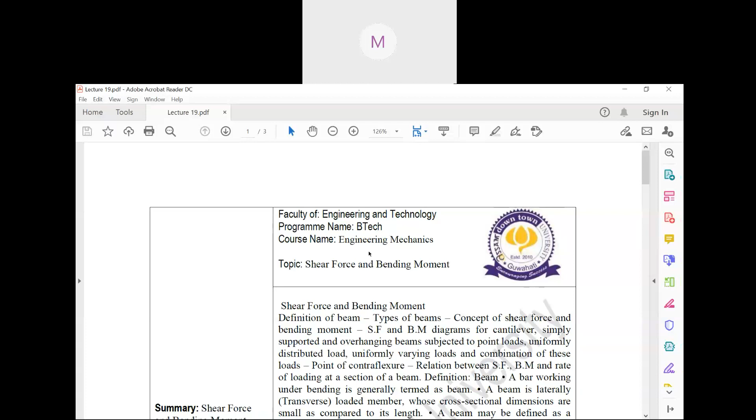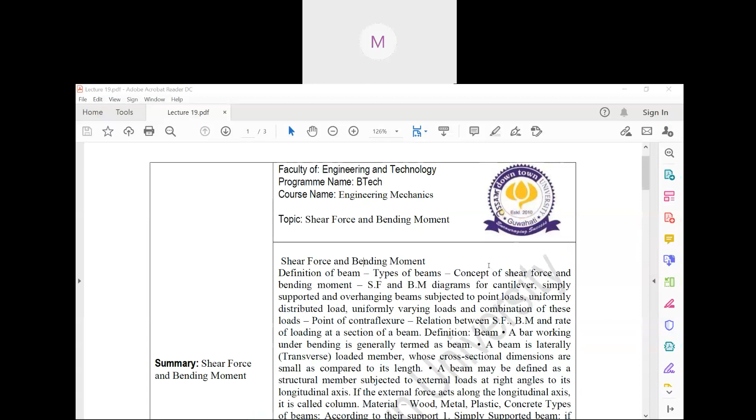So yesterday I gave you a brief introduction about beams, right? Are you clear about beams? What is a beam and everything? So today we'll discuss those things only, but in a more elaborate manner. So basically, what is a beam? Yesterday I discussed that a beam is a laterally loaded member whose cross-sectional dimensions are very small compared to its length.

Now, a beam in a structure may be defined as a member that is subjected to certain external loads, which means it is under the influence of certain external loads. Now there are different types of loads. These loads may be dead load, live load, self weight, whatever it may be. Okay.

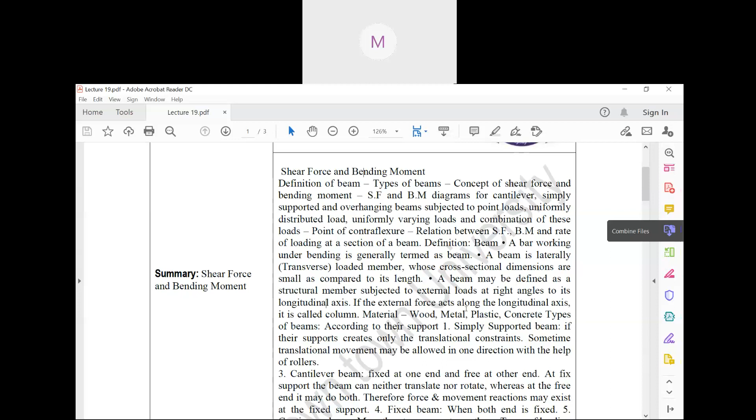So now in a beam, the load acts only in what? Perpendicular to the beam. Okay, that means what? Suppose this is a beam. The load will, in most cases, be perpendicular. Okay, so now according to the support, there are different types of beams. First of all,

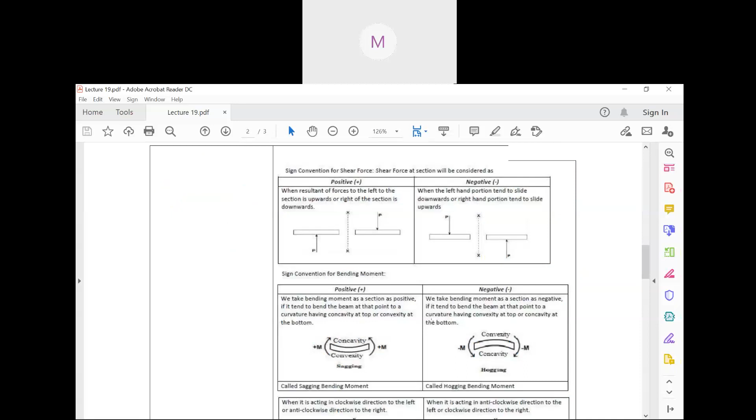number one is simply supported beam. In a simply supported beam, the beam creates only translational constraints and translational movement is allowed in one direction with the help of rollers. Suppose we draw a simply supported beam in this manner. In this simply supported beam, these two are the supports. And the load is placed like this. So the beam is simply supported here. Just remember that.

Now, number two is cantilever beam. In a cantilever beam, the beam will look somewhat like this. One end, as per definition, is fixed, and the other end has a load. This kind of beam is called a cantilever beam. One end is fixed; the fixed end is denoted in this manner. So this is the fixed end and this is the free end. So this is known as a cantilever beam.

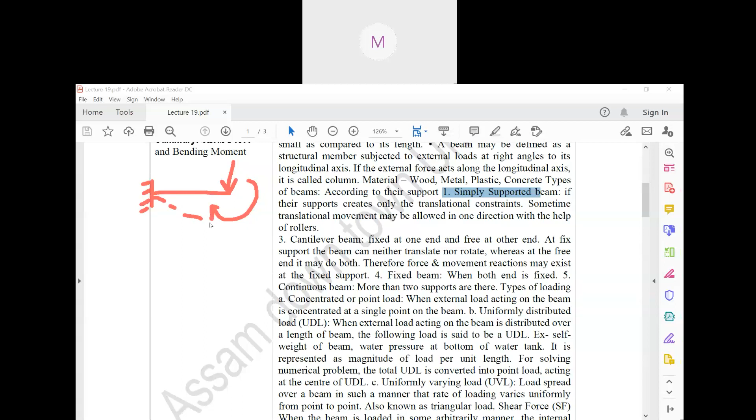Suppose this is the cantilever beam. Now you are given certain loads. If you are given certain loads, there may be rotation, or it will come like this. So this is translation movement and this is rotation movement. So at the free end it can do both. Therefore the reactions of this force will exist in this part. This is the basic fundamental thing of a cantilever.

Now a fixed beam is just like this. It is fixed at both ends, so the fixed ends are denoted in this manner. Okay, so this is a fixed beam. That means it is fixed at both the ends. Okay, got it? These beams are fixed at both ends, so this is known as a fixed beam.

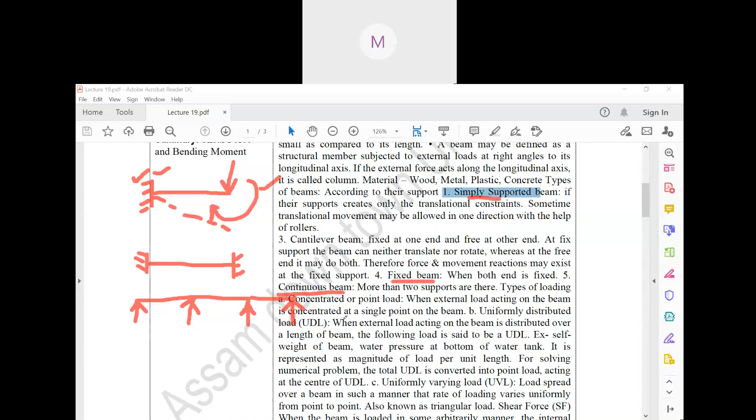Now after that, it is continuous beam. In a continuous beam, the beam is supported by... here is one support, here is another support. If it has two supports, then it is simply supported. Now if it has more than two, like it is continuous, suppose another support is here, then it is known as a continuous beam. Okay, it should be clear to all of you. I'm showing you certain examples now.

I guess it should be clear for all of you now. Yes, sir. Wait, let me show you certain examples; it will be more clear for all of you.

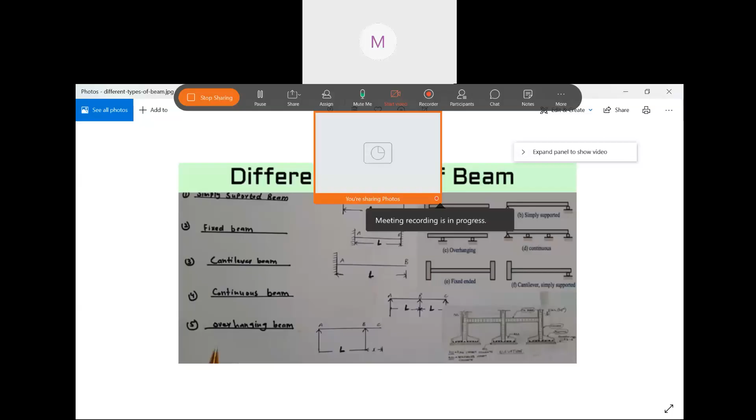Can you see the screen? Can you see the screen, students? No, sir. Okay, give me a minute. Now is it visible? Is it visible now? Yes, sir. So look, these are the different types of beam, sir. Yeah.

So number one is what? Simply supported. So in simply supported, if you see the supports like this, A and B, so it is simply supported. The distance between the two supports is what? L. Got it? So in figures, you can see it in this manner. Okay. Now after that, it is what?

Fixed beam. Look, I draw it like that. Fixed beam like this. Now this is point A, the first one, and second one is point B. And the distance between them is L. So that means the distance between the two fixed ends is L. Now this is the example of fixed ended beam.

After that you come to cantilever. Remember this thing. In cantilever, one end is fixed, and the other end is free. Okay, so this is cantilever. Now in continuous beams, what happens? The beam is continuous. Look, here is another support here. So these are the three supports: A, B, and C. So if there are three supports, then this is known as a continuous beam.

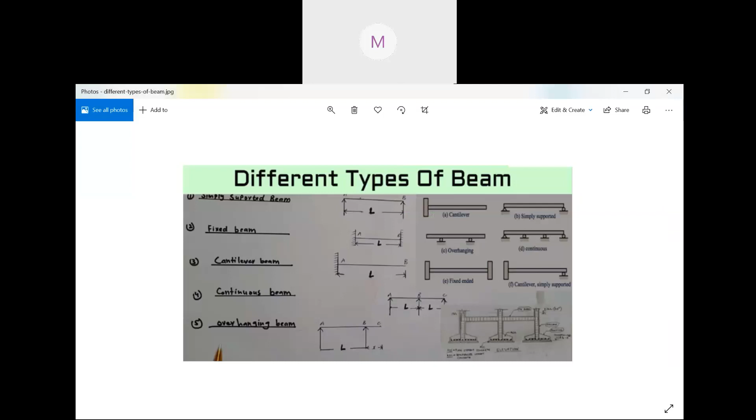So now after that, we'll go to the types of loads. So you got to know what are the different types of beams. Now there are basically three types of loads. So number one is concentrated loads. What is actually a concentrated load?

So in concentrated load, what happens? It is a point load or concentrated load. So what is actually a point load?

Sharing a slide, sir? No, sir, we can't see anything. No, I'm not sharing anything. Wait, I'll share it. Just a minute. Try to understand. Then only I can tell you.

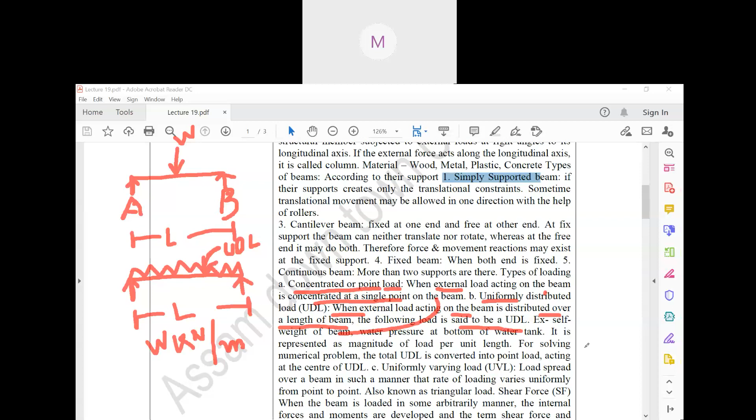That means what? When the external load acting on the beam is distributed over a length of beam, the following load is said to be what? UDL. Now look, what is an example of UDL? Suppose there is a water tank above a beam. So the load that is acting, it is uniformly acting on the beam, right? So that is known as uniformly distributed load. Okay. So the load of UDL is acting per meter length. Okay. So now I'll show you certain pictures, then you will understand it more clearly.

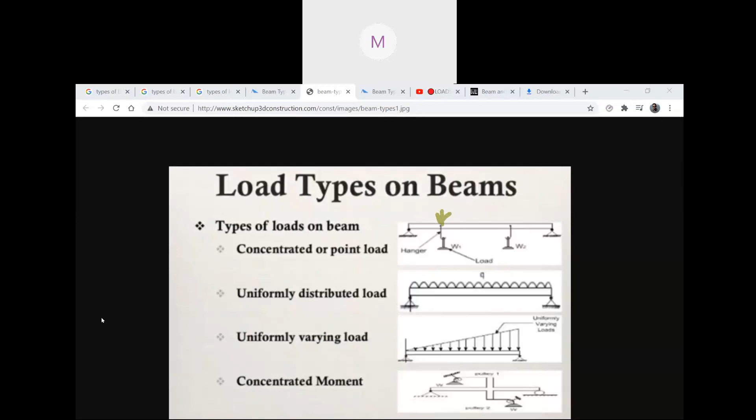Now if you can see, can you see this one? Can you see it? Okay, so if you can see here, what are the different types of loads? Look, here there is one concentrated or point load. So that means what? This is shown in a different member, but it can be acting in this member. Okay, so these are concentrated or point loads. Now uniformly distributed load. Just now I showed you this is uniformly distributed load. Now uniformly varying load means what? It is varying. Okay. So this one leave it for now. We will discuss it later.

So this is uniformly varying load means what? Look, this load here, a load of W is acting per meter. That means what? This is uniformly distributed load. Now, if it is acting per meter, then if we measure, suppose this is L meter. So if we measure the whole distance, W into L, then we will get what? In the form of a point load, right? It is acting whole, now per meter.

Suppose this is 5 kilonewton per meter, and the distance L is equal to 4 meter. Now, in order to convert this thing into a point load, we can just multiply it with the distance, then we will get the point load. Okay, so this is how it is being done. It'll be clear for you once we do the numericals. Okay.

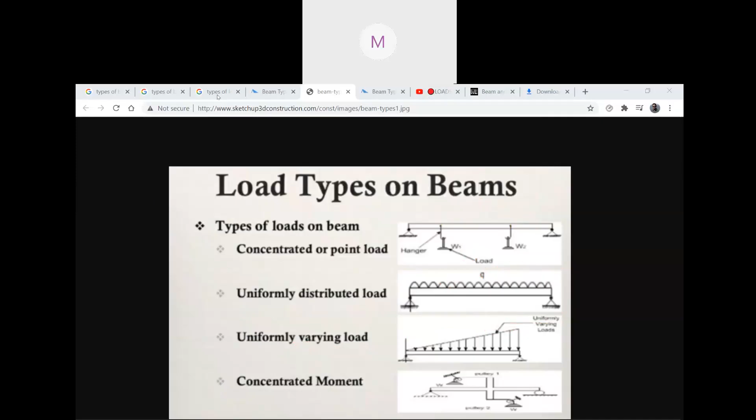Now another important thing that I want to tell you is regarding this one. What are actually the different types of supports? So if you can see the slide here, look, these two are the different types of supports in a simply supported beam. Okay, this should be clear to you actually. This is a hinge support. We'll discuss these things maybe next semester in structural analysis, in a more elaborate manner. So as of now, you just remember it.

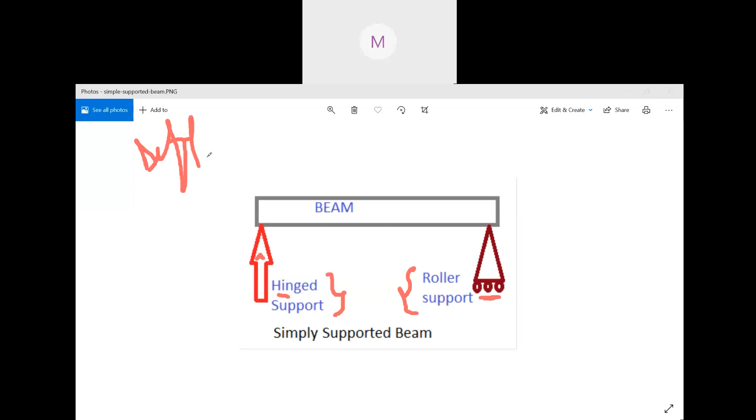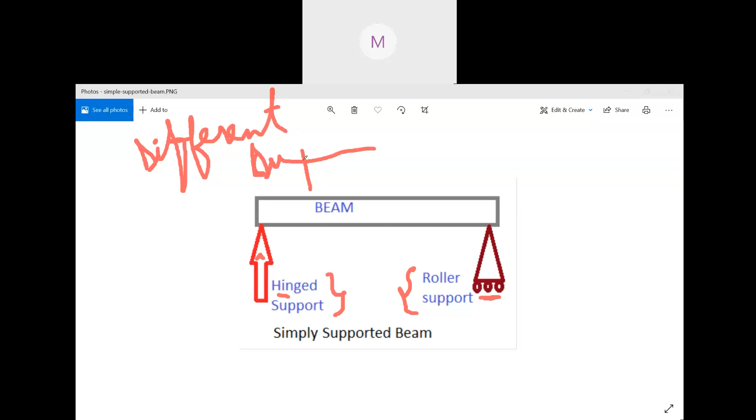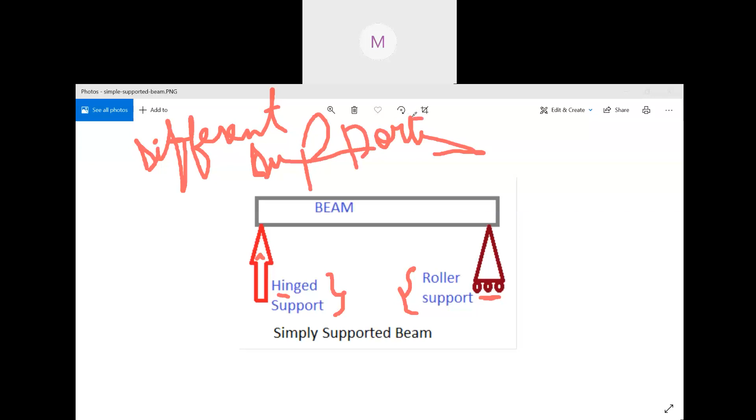This is a hinge support, if the support is in this manner, and this is a roller support. Look, there is a roller sort of thing, right? So this is a beam. So these are the two different supports in a beam. Okay, so these are the two supports. So remember these things. These are very important. So different types of supports. Now let us go.

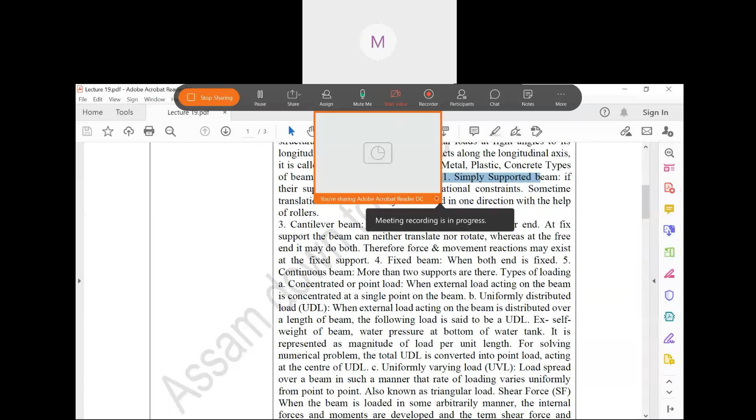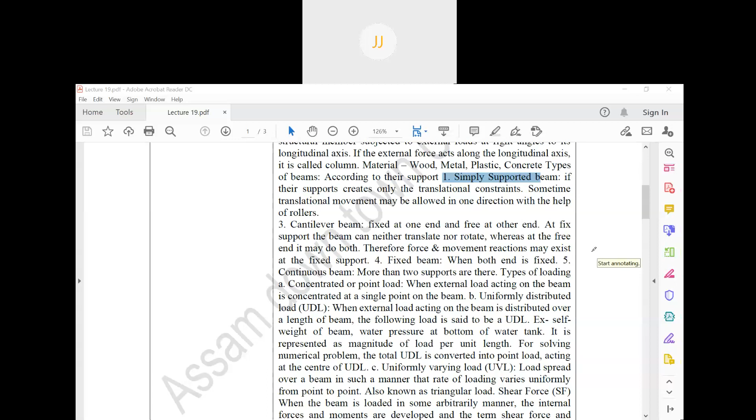So here only, look, just now we discussed it. So is it clear for you what I have taught? Yeah, students, is it clear for all of you? Yes, sir. Okay, fine. Good. What about others? Anyone else facing any doubts? Sir. John Kelly, right? Hello. Hello. Yeah, ask your doubt. What are you facing? Your mic is coming, please. Any doubt? Yeah, say. I'm not able to hear you. Look, you write in the chat box.

So, types of loading, here it comes. Number one is concentrated or point load. So when external load is acting on the beam, concentrated at a single point on the beam, then it is called concentrated or point load. That one I explained. Now uniformly distributed load, UDL. Now what is UDL? Just now we discussed, right? When the external load acting on a beam is distributed over the length of the beam. That means at the whole length of the beam the load is distributed. So the following load is said to be what?

UDL. For example, self weight of the beam, then water pressure at the bottom of a water tank. So it is measured by what? Magnitude of load per unit length. That's what we just discussed, W per meter. So for solving problems, what happens? The total UDL is converted into point load.

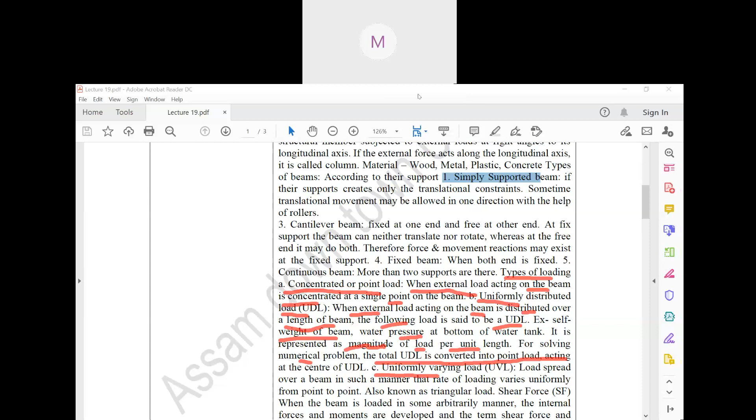So that means what? The load at some point is less, and at another point it is increasing. Just now we saw the diagram. So that is known as uniformly varying load. Okay. So this is known as the uniformly varying load.

Hello, sir. Yeah, bro. What if we put point load? What if we put point load on one side of the support? Only the one support side or also the beam? That doesn't matter. One side of support or beam. Yes, sir. One side of support or beam. Sorry, I'm not able to get you.

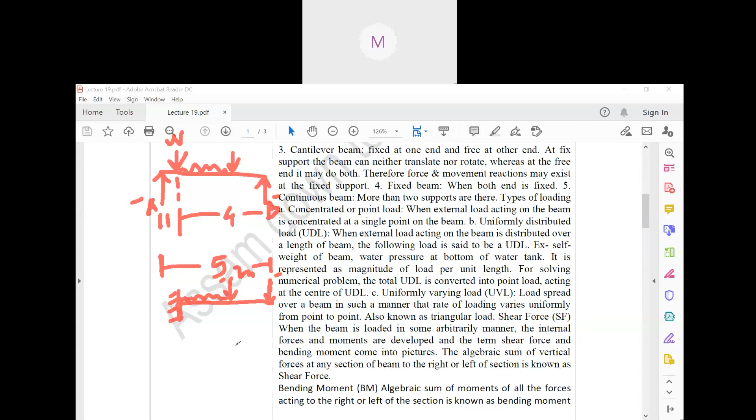So now look, there are two terms now: shear force and bending moment. What is shear force? Suppose it is given in the definition. When the beam is loaded in some arbitrary manner, some internal forces and moments are developed in it. So suppose this is the beam, and this beam is loaded. This is the load, this is the load, then this is the load.

That means some internal forces or moments are developed, and the term shear force is known as the algebraic sum of all the vertical forces. This force is acting, this force is acting, this UDL is acting. So you add all these forces which are acting left or right to the section. Just remember this part.

So suppose this is the beam. If you divide it into two sections, you have to find the forces either to the right of it or to the left of it. The sum of forces acting to the right or left of the section is known as shear force. Now shear force is fine; you have found the sum of the forces. After that, what happens? You'll have to find out.

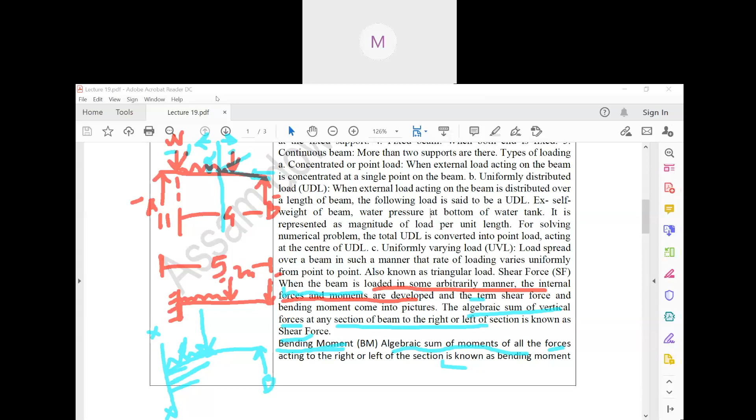So the summation of all this, this force into this distance, then this UDL into the center distance. The UDL is always measured from the center. If you add these up, it comes out to be the bending moment. So the algebraic sum of moments of all the forces acting to the right or left of the section is known as bending moment. So this is how we define shear force and bending moment.

Do you have any doubts? Do you have any doubts? Yes, sir. Once again, bolo. Shear force, sir. Okay, shear force.

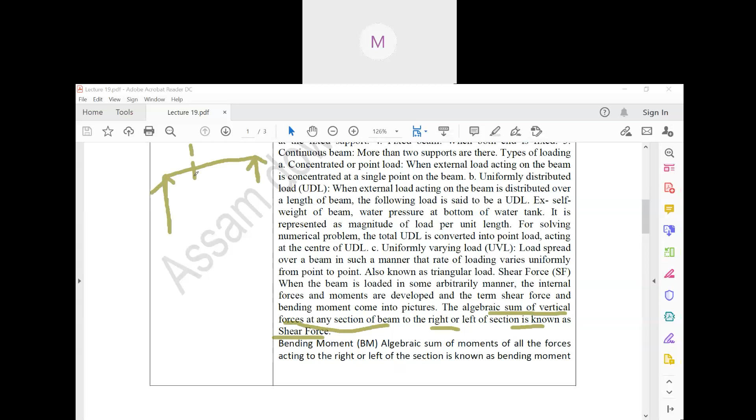Look, the algebraic sum of all the forces that are acting to the right or left of a section is known as shear force. So suppose this is the beam. We cut the beam in half. Suppose there is one force acting here, and if this is the support, it will also give one reaction force. So these are the two forces that are acting.

So if you add these two forces, for this section these are acting to the right. The algebraic sum of these two forces acting to the right of this section will be the shear force. So basically shear force is the summation of all the forces acting on the beam. As of now, simply remember that.

And the bending moment is the summation of all the moments acting to the right or left of a section. Force into perpendicular distance is moment. Suppose this is the perpendicular distance, and this force is acting at this distance. Then the force into perpendicular distance is known as the bending moment. So that is bending moment and shear force. You can understand a little bit now.

Temazar. Temazar. Yes, sir. Yes, sir. Okay. You asked me for any doubt. Just try to recall these things. In the next class, if you have any doubt, you can ask me. Okay. I think it's fine for every one of you. Sorry. Anyone else? Any problem? I think no one has got any problems.